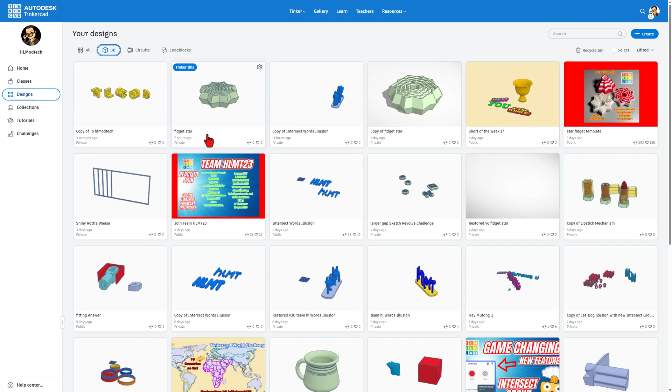Normally they are all saved as private, but you do have the option to make them public. Today we're going to hit create new 3D design. I like to start by naming my projects. This one's going to be CS for countersunk, and it's going to be screw.

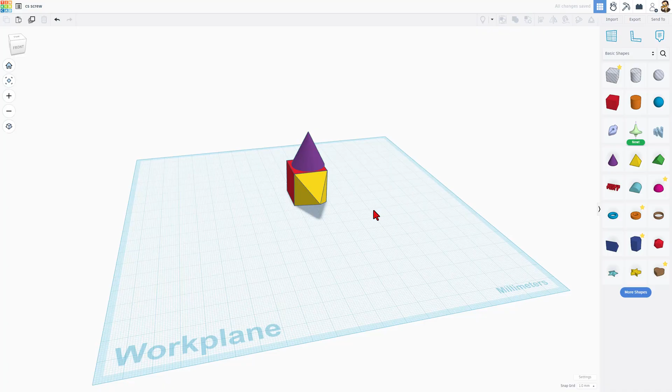If this is your first time seeing Tinkercad, we generally build with solid shapes. You can stack them on top of each other, you can put them on any face, you can build super quick this way. As soon as you do put things in, they are automatically saved.

I just want to show you, if we back up to the dashboard, bang, there's our project. To re-enter your saved project, you simply hit Tinker this.

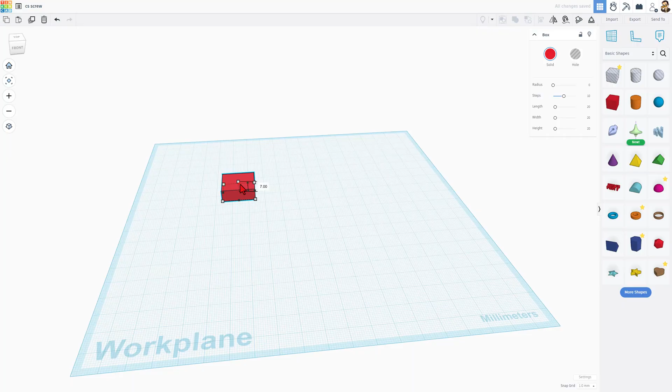Once upon a time, I would have built this with this cone, but I don't need to anymore. Check this out, I'm going to bring out this cube. I'm going to quickly stretch it to 6 by, say, 80 or whatever, and then we're going to countersink into this. Well, we're going to do it with the brand new Sketch Revolve.

When I bring this out, I'm going to set it on a 20 by 20 grid. This just makes it line up nice inside.

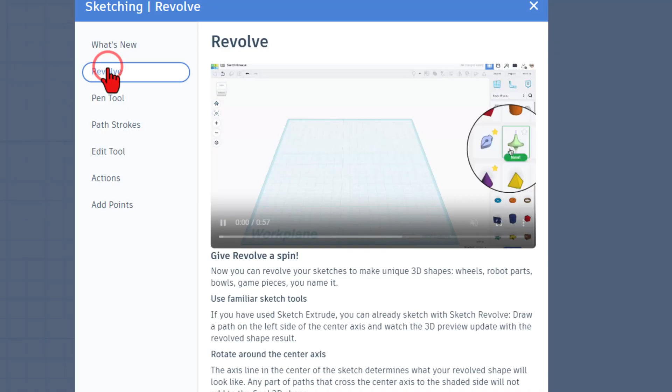If you've never used the sketch tool before, I do want to highlight the sketch features. This area always shows us what is brand new and cool, it's always worth checking out. You can click through these at your leisure, there are animations that help make it more clear. They also have audio, you can move through these and learn all kinds of amazing skills that you can use in all of your projects. Once you're done clicking through them, of course, you can click the X and return to this screen.

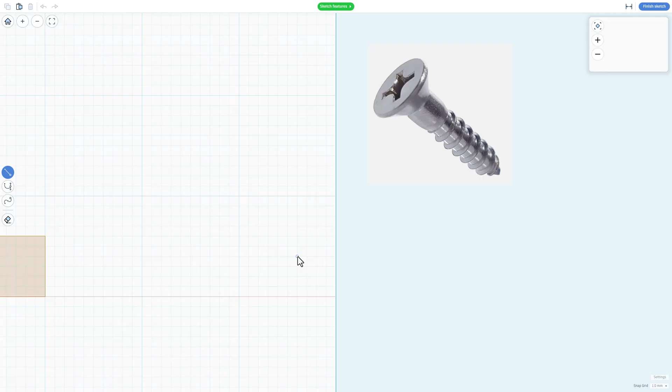For this project, we're only going to use a line, and we also need to know the measurements of the screw we're working with. Now, the user mentioned cap screw and cone, so I'm assuming that we're talking about a wood screw. If it is a different shape screw, you just change the profile from what I show you here.

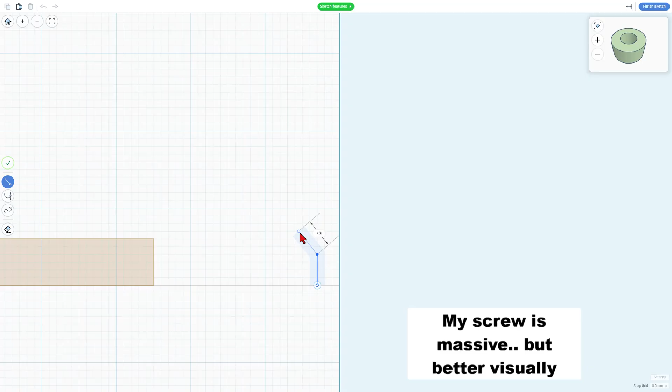I'm doing make-believe, but let me show you what I'm going to do. I'm going to say that I have got a 6mm screw, so I'm going to do a radius of 3. I'm going to bring this up, let's say 4mm, that's how far I'd want it to go in. And then if we measure the head of that screw, I'm going to say that mine comes out to 6. And then I'm just going to click and finish the part.

When we hit finish sketch, check it out, we have just built a part that we can make a hole.

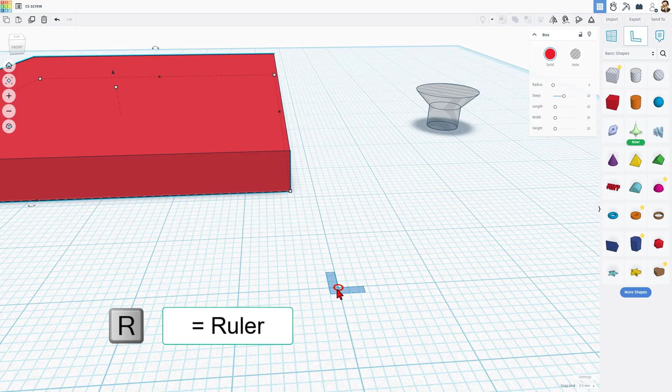Now that we've got our fun part, let's get this aligned. I'm going to start by bringing out the ruler, and I'm going to put it right on one of these corners of the grid. That snaps perfect, so now I can click on this shape. And if I change these numbers to the exact measurements, see how this is 71? If I make it -71 and press enter, it snaps to that line.

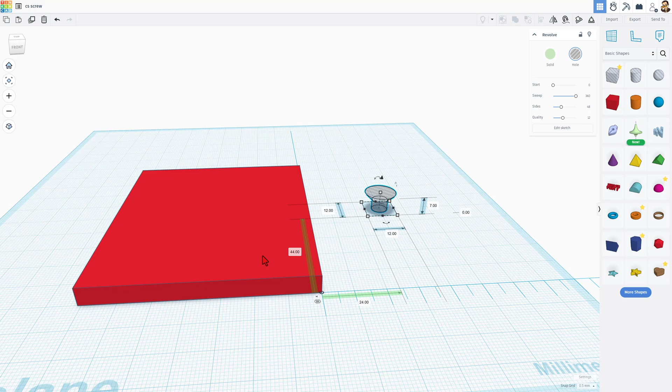This dimension that's 22, if I make it 0 and press enter, it snaps right there. If I click on this shape, I can make it move to the exact spot I want. Say I want it to be 10 right here. If I type 10, bang, it snaps to a distance of 10.

If I wanted to measure from the middle of that shape or the dotted line, I can switch to midpoint. So now I'm going to take this and change it to 20, so that way I know I've got a decent gap that way.

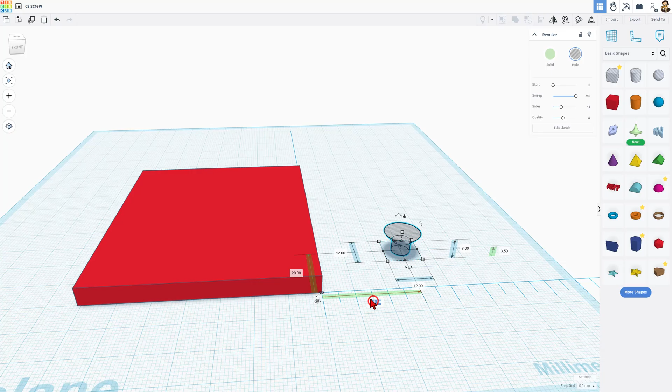Instead of 30 this direction, I'm just going to walk this in and show you. If I do 0, it's half and half on each side. If I change it to -15, just like that, from its midpoint, we're 15 over.

Of course, now I would want to make these match so that it looks cooler. There's 15 by 15, and then I do want to sink it in. I'm going to do that by doing L for align, clicking on the red one to make it the master.

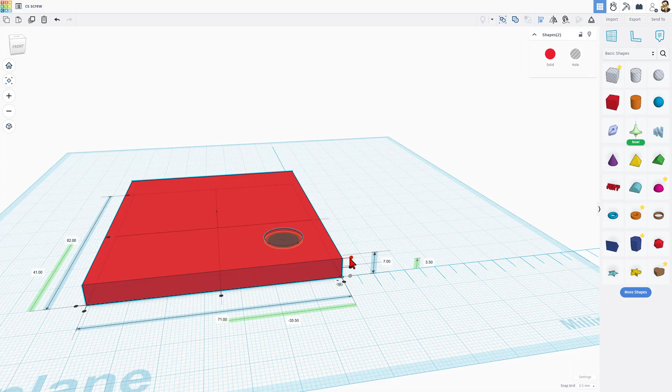And bang, setting them for the top. When I do Control G to group, we have just instantly placed a countersunk screw hole.

How cool is that? Real quickly, let's put them in all the corners. I'm going to simply ungroup it, click on that piece, and do Control D.

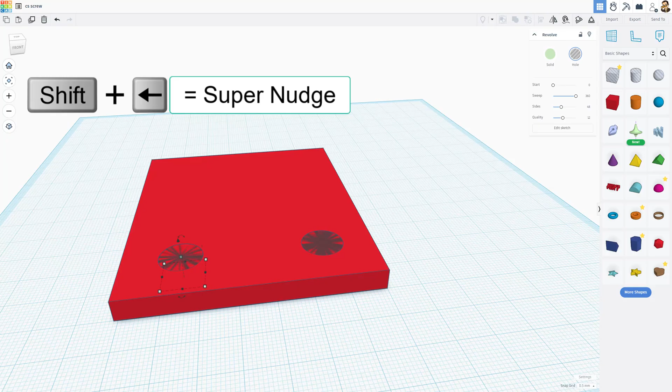I'm going to shift nudge over. I'm going to bring the ruler out, but to make it even easier, I'm going to go to a whole millimeter nudge. That way it'll just snap right to that corner.

As soon as I get it to the corner, I can click on the shape. And once again, we know we want 15, which we've got, and we were so close on 15 this way. We do, of course, want to make sure that we're using the midpoint. If it says use endpoint, that means you are using the midpoint.

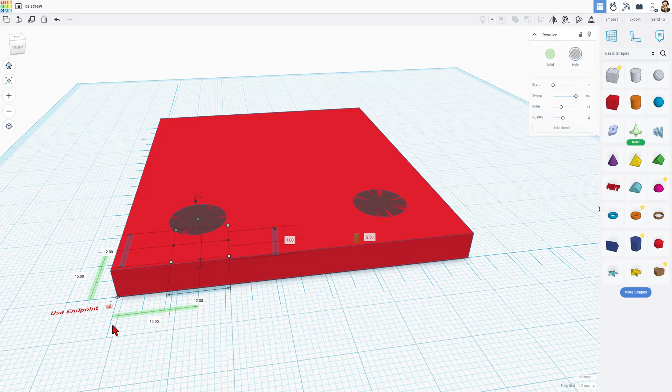I'm going to do this same step for the other side. Once again, dismiss the ruler, add the ruler. We want to put it right on this corner, and we're going to do one more thing tricky here.

When we click this, we can rotate it the other way. All I did was click on that point. I can hide this for a second.

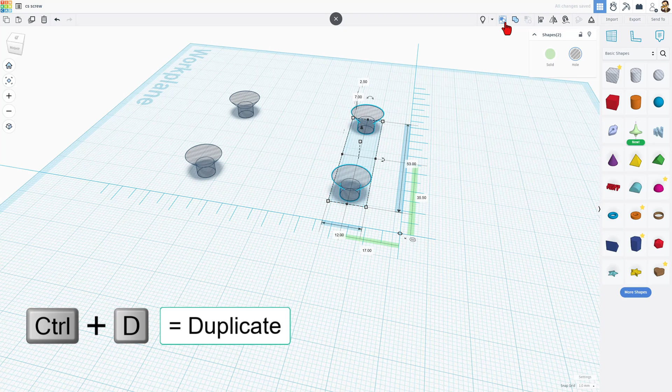We can grab these, do Control D, Shift nudge down close. Once we do Show All, where this says 17, we simply want to switch it to 15 and press Enter.

Dismiss the ruler, grab it all, and do Control G to group.

All right, so as I wrap up, I do want to say thanks for the question. Love projects like that. Simple skill, but if you haven't ever thought about it, you may not know how to make it all come together.